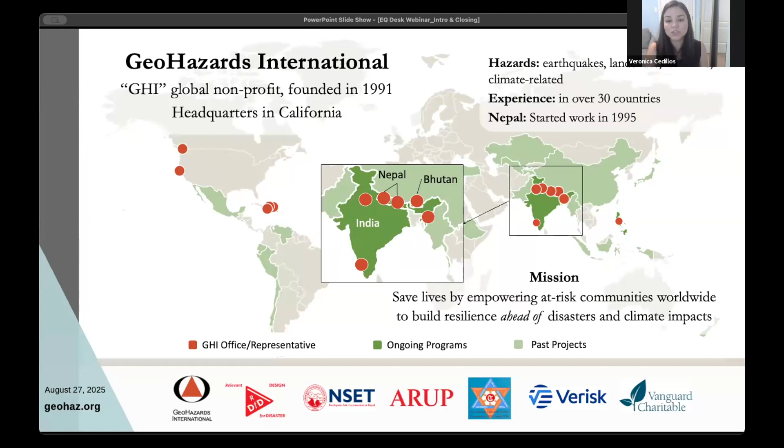For those of you not familiar with GHI, I wanted to give a brief overview. GeoHazards International is a global nonprofit. We were founded in 1991 with headquarters in California. Our mission is to save lives by empowering at-risk communities worldwide to build resilience ahead of disasters and climate impacts. We work on earthquakes, landslides, tsunamis, as well as climate-related hazards. We have experience in over 30 countries, and particular to Nepal, we started working there in 1995.

Before we jump into the particular topic of earthquake desks, I wanted to give you a broader context of the multifaceted approach we are taking to earthquake safety in Western Nepal. GHI works to promote safer new school construction and also to identify and strengthen existing vulnerable school buildings. These are very traditional ways of addressing earthquake safety that we know work. But unfortunately, given the vast number of schools to be addressed and the pace at which they're being addressed currently, if we only address school safety from these two perspectives, it would take close to 200 years for all of the vulnerable school buildings to be made safer. For this reason, it's really important for us to look at interim solutions to help protect the lives of a generation of school children in the meantime in vulnerable schools. So this is why we're looking at earthquake desks.

As we jump in, I wanted to give you a brief overview of what you're going to be hearing today. We're going to start with some background on the project itself. Then we'll get into the design and technical aspects of the earthquake desk. We will then move on to the on-the-ground considerations in Nepal, and finally end with local engagement and implementation.

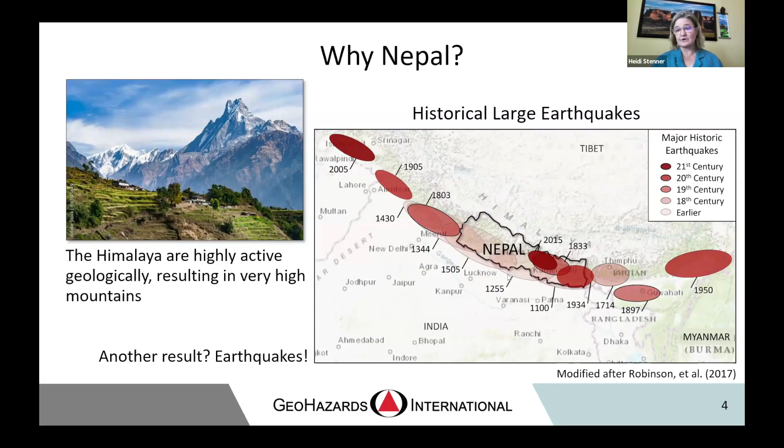And another thing you might notice is that here in far west Nepal, you see these very faint red circles, and that's because the last large earthquake was over 500 years ago. That's why we're focusing on far western Nepal, because that area is particularly at risk. We know eventually there will be a large earthquake. And in addition, there are a lot of smaller earthquakes occurring.

So the far west of Nepal is our first focus area, but ultimately we would love to have earthquake desks in all vulnerable classrooms. Another reason we're focused on the far west is because communities can be easily isolated by landslides during earthquakes or even monsoons. And there's just a lot of vulnerable schools. There also hasn't been any major rebuilding effort like there has been in central Nepal after the 2015 earthquake, where a lot of schools were rebuilt or retrofit to make them safer.

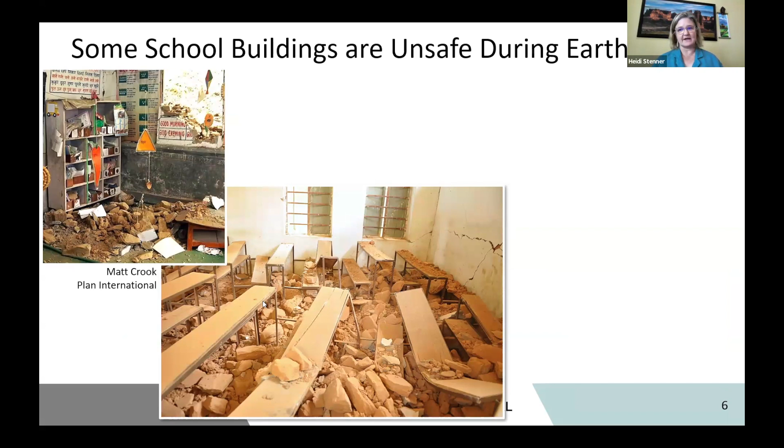So of course, buildings in earthquakes can be unsafe. You see here some pictures. If you imagine sending your kids to school, you'd be hesitant because this can be scary. The pictures on the left are from the magnitude 7.8 Gorkha earthquake in 2015, but even more modest earthquakes, a magnitude 5.7 or 6.4 depending on who you ask. The right two pictures are from the Jajarkot earthquake two years ago in far western Nepal. You can see this school building has had a lot of damage and it would not have been safe to be in it during the earthquake.

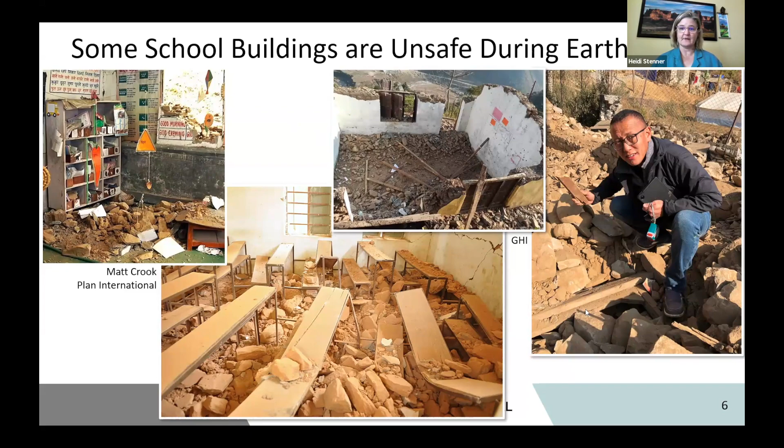And here on the right is my colleague Ishi Lote, standing on another collapsed classroom. This wood piece is an actual desk where students would have been sitting. Fortunately, in both of these earthquakes, class was not in session. So obviously we want our students to be safe during earthquakes. That is why, as Veronica mentioned, GHI is working to promote safer new schools and training for masons. We're also promoting retrofit, but earthquake desks we think can fit into that picture.

So here's the situation as of 2021. There are approximately 35,000 schools across Nepal, and each school has multiple buildings. If about 65% of them are seismically vulnerable, how long might it take to make those all safer? Well, in the 7 years of Nepal's school sector development plan, 120 schools were retrofit or replaced each year. If we use that rate, which takes a good amount of resources, it would still take about 200 years to make all the schools safer. So for the generations of kids going to school in the meantime, we think earthquake desks could be an interim solution to help make them safer.

So, okay, now that we have this beautiful design that is incredibly exciting, we wanted to know, is this even a feasible project for Nepal? Back in 2020 to 2021, we conducted a feasibility study and visited 62 schools across 6 of the 7 provinces of Nepal. We were looking at classroom size, classroom shape, desk types, organization. We talked with people about earthquake desks. We looked at school vulnerability, how much existing desks cost, and we were exploring local manufacturing.

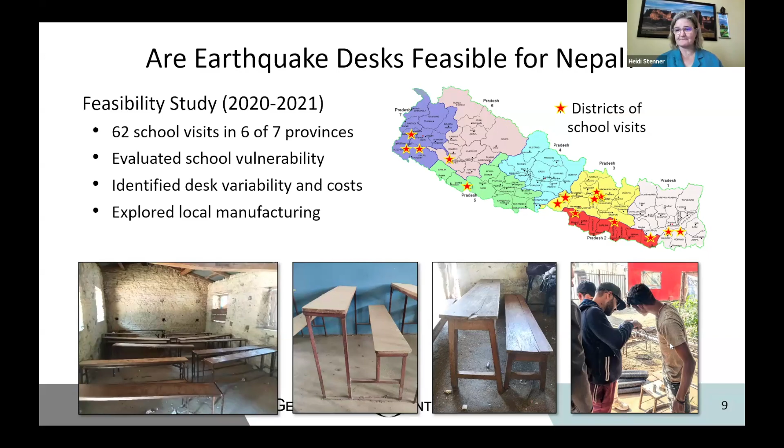Our main findings from that 2021 study are that classrooms can be overcrowded. It's not in alignment with the government's policy, but they can be overcrowded. The desks typically are narrow desks that often seat 3 or 4 or more children. We also found that obviously small children use smaller desks. And the stakeholders we talked with generally had a lot of interest in this design.

We also saw that a large percentage of school buildings are vulnerable in the far west. For example, a couple of studies showed that in one municipality in the far west, Amargadhi, approximately 89% of school buildings are vulnerable to heavy damage or collapse in earthquakes. And that is not an uncommon finding across far western Nepal. So there's a lot of vulnerability.

We also found that making prototypes, which are just one-off, cost less than twice that of the regular desk, and that they last longer. We were also thinking that because there are a lot of rural areas, transportation costs can be quite high for bulky desks.

So ideally, desks should be manufactured as locally as possible. Some of our key conclusions from that 2021 study were that earthquake desks shouldn't be too narrow. We don't want them to tip over. We want them to have enough space to cover children.

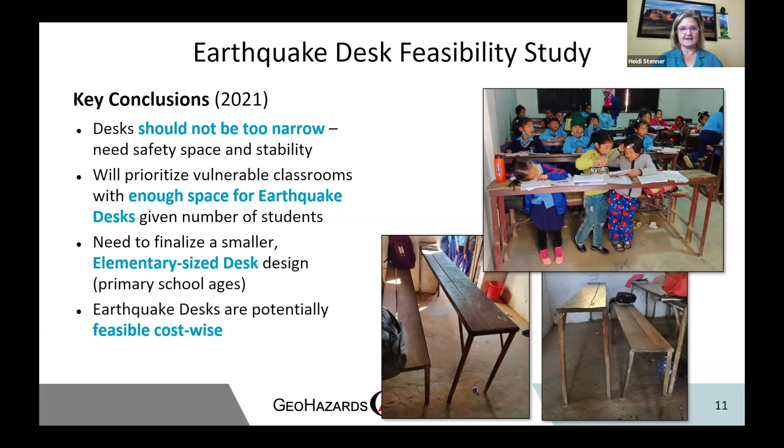We need to prioritize putting earthquake desks into classrooms that do have enough space for the given number of students. And we need to finalize - Ido and Arthur had designed an elementary school, primary school size desk, but it hadn't yet been fully fleshed out, built, and tested. So we wanted to do that, which has been done. And we thought that earthquake desks had the capacity to be feasible cost-wise. That was really exciting for us. So once the feasibility study was done, we felt like we could proceed.

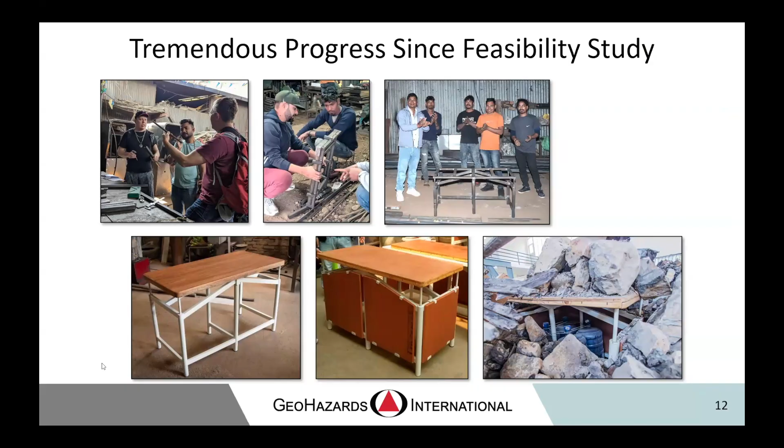Over the 5-year program so far, we've made a lot of progress, and you're going to hear about that today from a bunch of different speakers. I just want to mention, we went from building prototypes, training the manufacturers, to testing them. So it's very exciting, and I'm going to turn it back over to Veronica now.

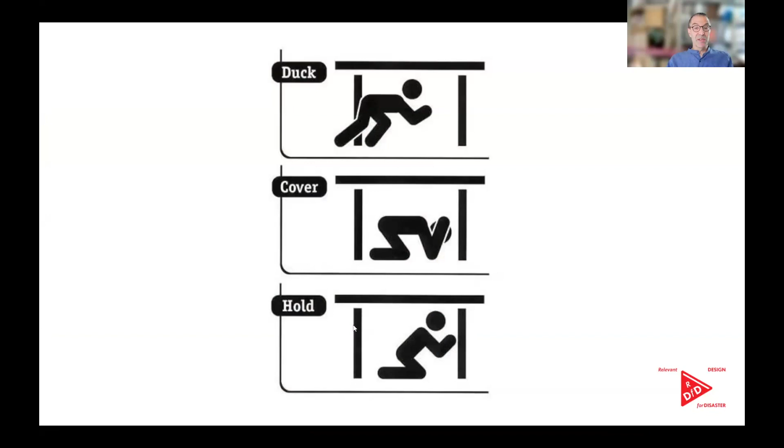Our story begins in 2010 with the big earthquake in Haiti. My student at that time, Arthur Brutter, was exposed to images of collapsed buildings with children under the desks in a school in Port-au-Prince. Arthur realized that the famous duck, cover and hold protocol, which is the worldwide protocol for school children's response to earthquakes in seismic hazardous zones, would benefit from a desk strong enough to create significant protection. This was and still is the case in many parts of the world, as you can see here. In these examples of collapsed schools, one can see that when the school buildings are not built to withstand earthquakes, the problem becomes acute.

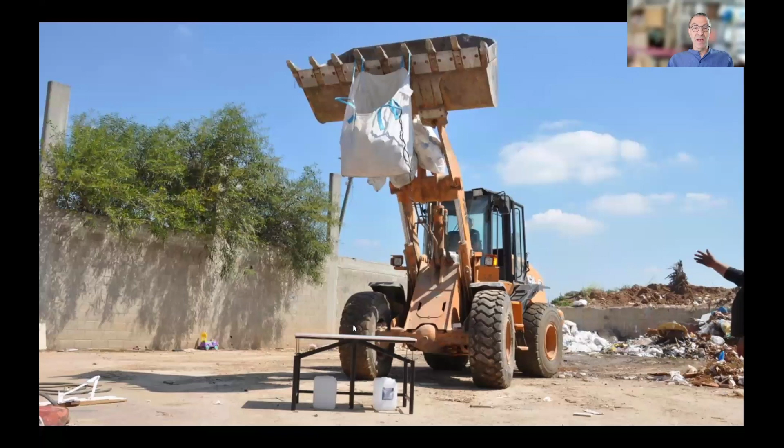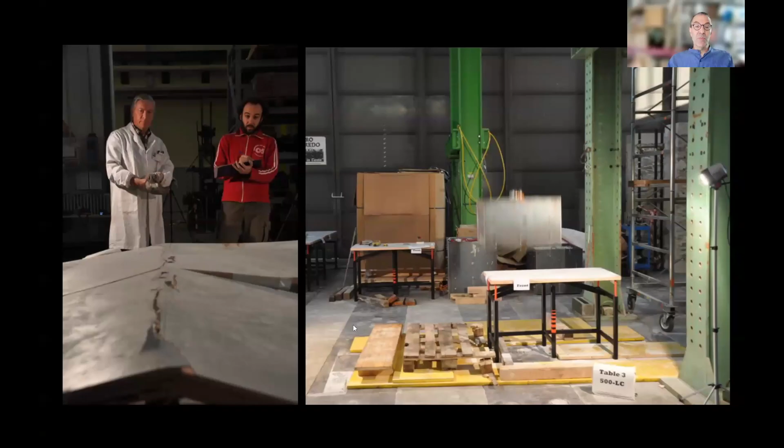So Arthur began building prototypes and convincing people to test them. Those initial prototypes were far from a working product, but the preliminary tests gave us enough information to believe we could reach a real solution. After further development, we filed for a patent, and then after Arthur graduated, we traveled the long and winding road that leads from an idea to a real-world working product. It took us 2 years of experimentation to reach results good enough to seek an official endorsement of our claims. We took 24 desks to Padova University in Italy, to the department that specializes in earthquake-related engineering, where we conducted a series of tests.

Here's a view of some of these tests from 2012. On the left-hand side, you can see a standard Italian school desk, and on the right, various weights and crush scenarios being tested. So here's an 800 kilo weight with dispersed mass, and then you can see a 1 ton weight with compact mass.

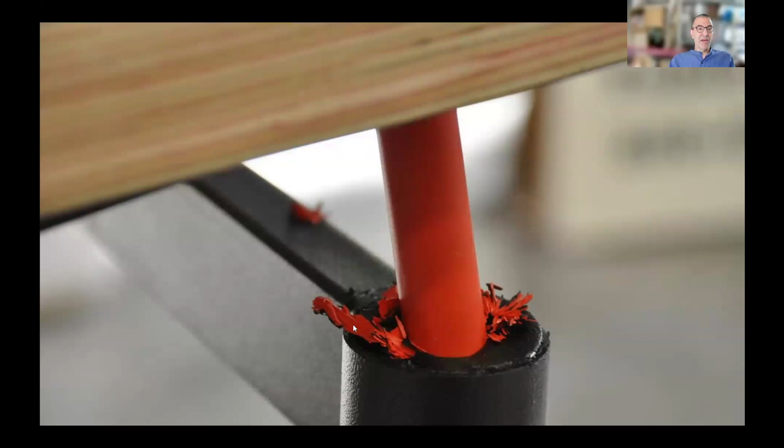So we were extremely satisfied with the results. The desk proved able to maintain a significant safety zone underneath. This was achieved by mechanisms similar to modern automotive design. In order to do this, parts of the desk are designed to crumple and bend, dispersing the energy and transferring it to the ground. This happens while a predetermined safety zone remains intact and protects those taking cover underneath.

The desk also needs to allow for normal daily classroom activity. Our main challenge was to make it strong enough yet keep it as light as possible so that 2 children could lift it up and move it around if needed. The desk therefore weighs only 26 kilograms. Thinking of the cleaning requirements of the classroom, we lifted the lower cross beams to allow for a broom to sweep underneath.

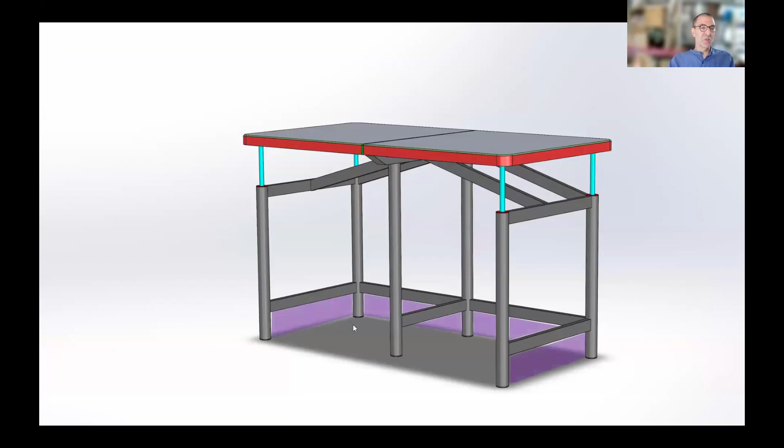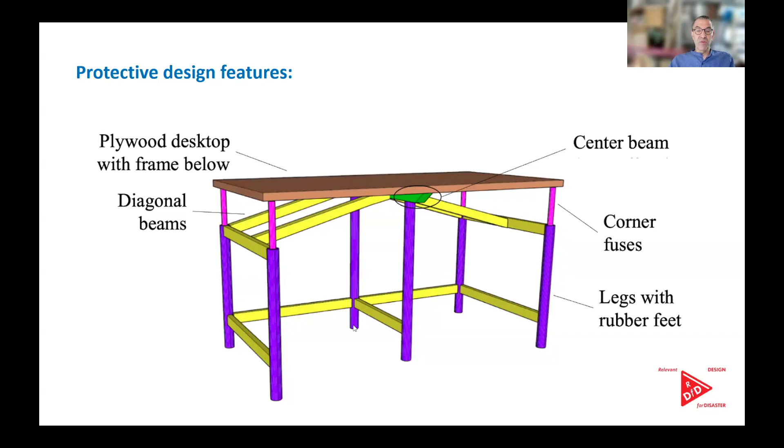This diagram shows the various features that contribute to the safety performance of the desk. The top frame and diagonals, here in yellow, support the desktop as it folds or breaks, building a 2-stage resistance upon impact, effectively preventing the breaching of the safety zone underneath.

The center beam in green, supported by 2 extra legs, not only keeps the structure from collapsing in the center, but also contracts to absorb some of the energy.

And the corner fuses in pink pop into the legs when impacted, creating internal friction and allowing the desktop to fold and create diagonal slopes that deflect secondary debris. And the rubber feet create ground friction that subdues the horizontal movement of the desk.

All along, we asked ourselves the simple question: can design save lives? We definitely believe it can, but in order to do that, we knew we needed to keep working, to find a way to get the desks to the places where they are most needed.

And always with the best of partners. We knew it would have to be a team effort. So in 2015, we were invited to present the desk at the 3rd United Nations World Conference on Disaster Risk Reduction in Sendai, Japan. Several thousand participants came to discuss ways to build the resilience of nations and communities to disasters.

Destiny made our paths cross with the GHI leadership. We were lucky to meet Karma Tshering, Hari Kumar, and Brian Tucker, the then president of GHI. And on the carpet, literally on the carpet of the convention hall, a long and fruitful partnership was born.

We were told that they just finished a campaign to convince children, teachers, and stakeholders in Bhutan to duck, cover, and hold. But they were worried that the desks were not strong enough. The earthquake desk seems to offer a solution.

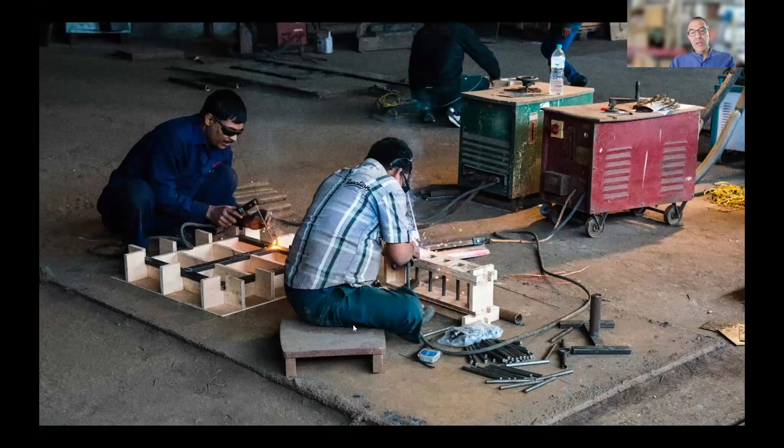We created a system of training for local manufacturers in Bhutan, designed and built a set of plywood welding jigs, and a series of manuals that allow 3 manufacturers to produce good quality earthquake desks for the Bhutan schools.

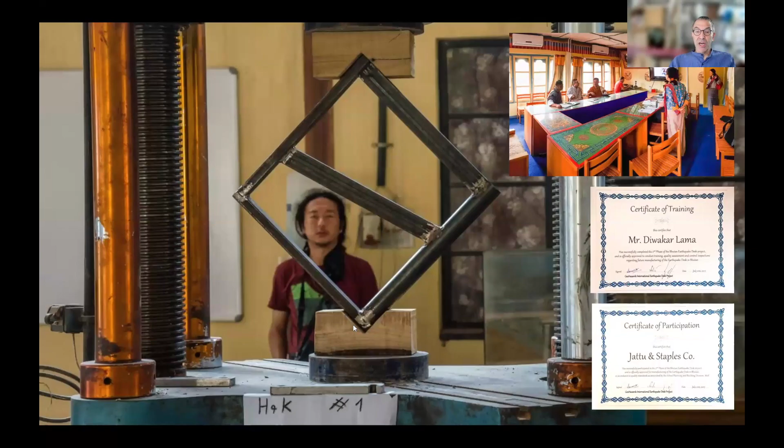With joint effort of the Bhutan GHI team and the Ministry of Education engineers, we created a quality assessment and control method that worked for both the local manufacturers and the government agencies. And after a long and demanding process, we had the satisfaction of delivering a few hundred desks to local schools.

The Bhutan project helped us reach a number of goals: to design welding jigs and production manuals, to establish and support the manufacturer's ability to produce safe desks, and to create a quality control and assessment system that is acceptable by all stakeholders.

We also were able to transfer the knowledge needed in order to manufacture and distribute desks independently, something we would like to scale up and move forward in Bhutan in the near future.

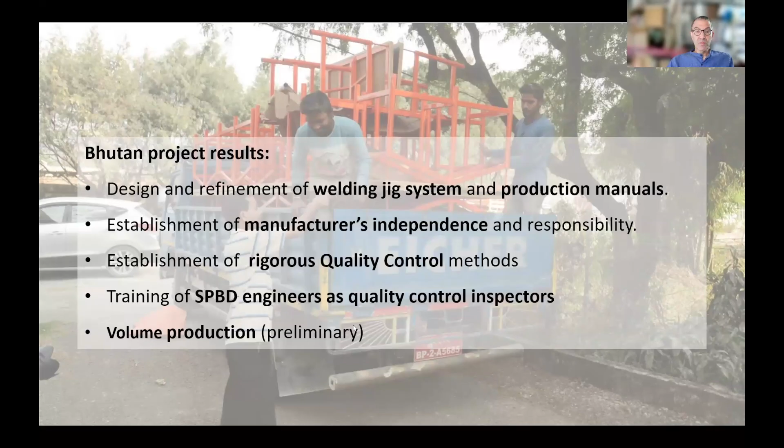And so moving on to Nepal, in 2020 we began a new and much larger project in Nepal. Nepal's population is 37 times larger than Bhutan, so it's a much larger and more complex project. Drawing on what we learned in Bhutan, we began looking at the complex challenge facing us in Nepal.

Now, in the next few minutes, I'd like to quickly run through what we've achieved so far in Nepal from a design point of view, and what more exciting goals and challenges face us in the near future.

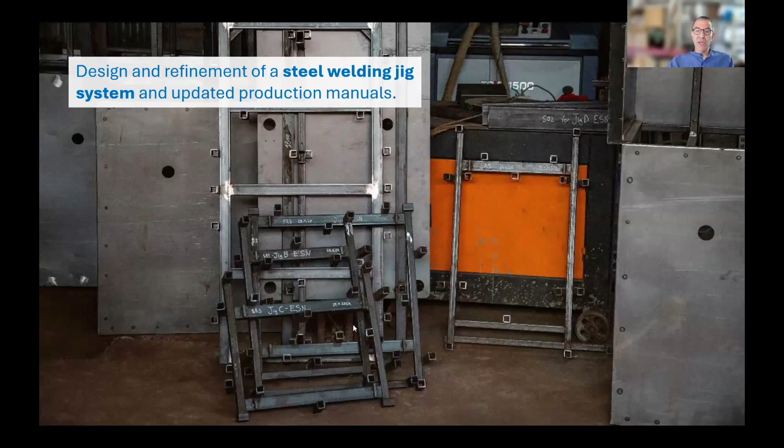The transformation of jigs from plywood to steel allowed for enhanced precision and durability. Once we built the steel jigs with the first manufacturer, SRS, in Kathmandu, they served for training 2 new manufacturers in Western Nepal. So we now have 3 fully trained manufacturers that have the know-how to build 2 different models of the earthquake desk.

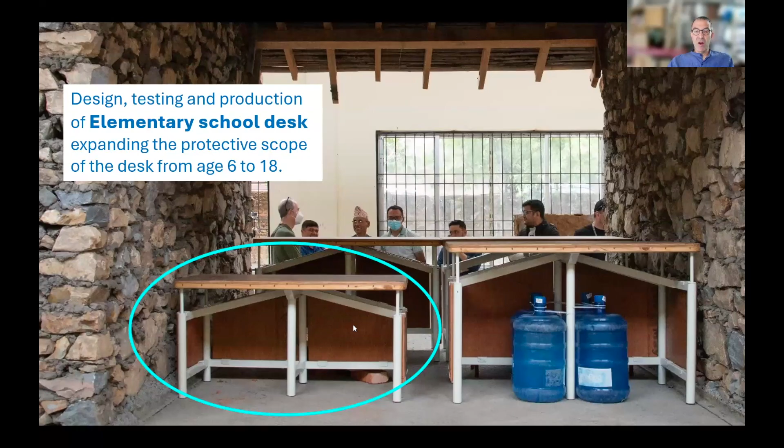The bespoke digital simulation tool created by the Arup engineering team gave us enhanced ability to push the development of the desk forward. Ben Shaw from Arup, who's with us today, will be presenting the simulator in detail soon and elaborate on this wonderful tool. But I'd like to say a few words from the desk design perspective.

In less than 2 years, the creation of the simulation tool has allowed us to add an elementary school model to complete the protective scope. We can now provide a full range of protection for school children of all ages.

It also enabled us to design, build, and test side protection panels to address debris falling in diagonal directions, such as walls buckling due to specific school building features in Western Nepal. I believe Mark Villetz's presentation will relate to that when he discusses the various tests we conducted at Tribhuvan University. We also benefited from the simulation of a narrower desk design.

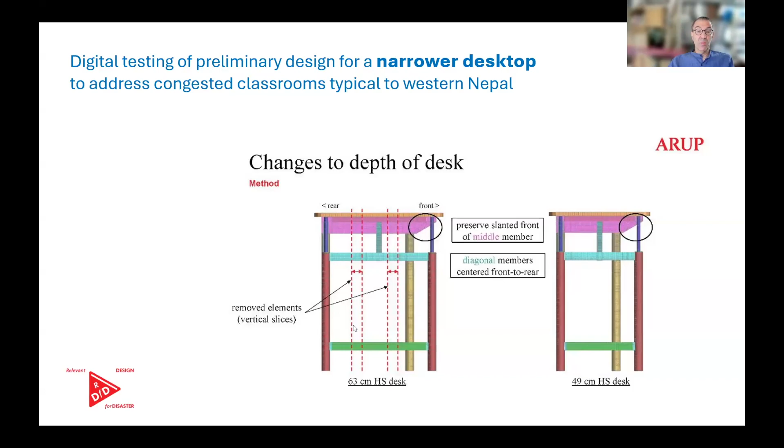Some of the ability to introduce desks to schools is challenged by small and congested classrooms. With the simulator, we could digitally test design adaptations that might help us in the future to fit more desks into each classroom.

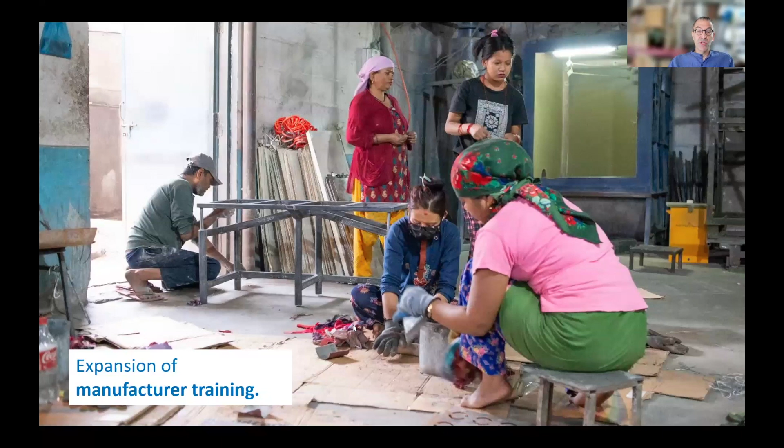So what would we like to do when we have the time and budget? Now looking to the future, I think we would like very much to expand manufacturer training. This will allow for better geographical distribution of manufacturing facilities and scaling up of production and desk placement in schools.

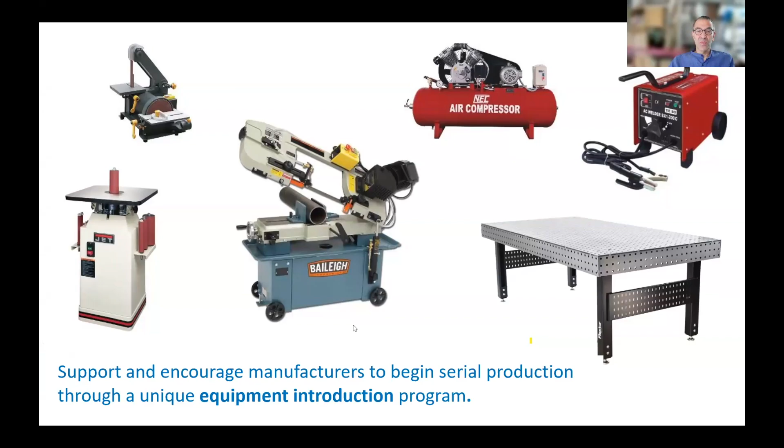We've learned that initial tool acquisition, leading to quicker and more precise manufacturing, is sometimes hindered by economic barriers and lack of adequate tools. We seek to create a program that will allow manufacturers to work with better tools earlier in the production process. We found that presentations and live demonstrations of the desks are highly effective.

It's important for us to have a continuous dialogue with many relevant stakeholders, including the engagement of the public in crush test demonstrations. We'd like to do more of those. And in the longer term, in a future phase of the project, build narrower desk prototypes and test them physically.

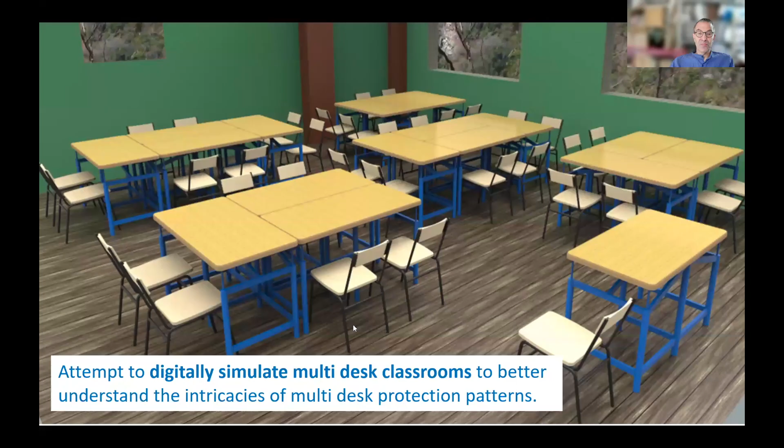We believe that an earthquake desk classroom holds a number of advantages in disaster circumstances, a classroom rather than a single desk, but it is difficult to project the actual performance of many desks together. This requires sophisticated programming and computer power we hope we can tackle.

And of course, our ultimate goal is to begin volume production and distribution of desks to as many schools as possible. At the end of the day, we want to have desks in place anywhere they can be effective.

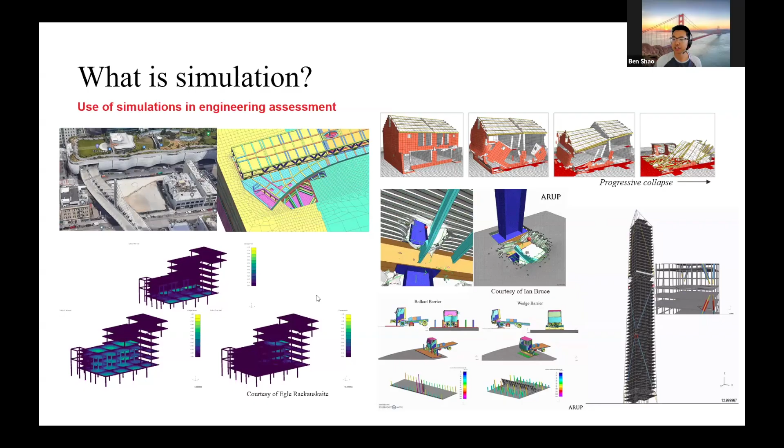So why do we think simulation can be important and add value to the project? As Ido mentioned about the desk design and also some of the testing, looking at the desk itself, the engineering assessment of the desk is a very important part of this whole initiative, to make sure that we understand how the desk is going to behave during loading, and whether the desk is strong enough to resist the expected loading in earthquakes.

Obviously, to do the engineering assessment, one best way is to do testing, as you can see here, and Ido mentioned a bit, and I'm sure Mark is going to talk more about that in a minute. But why do we need simulation? Because sometimes testing has limitations - you need to set up the test, it's lengthy, and sometimes it costs a lot, so it's not that flexible.

So simulation can really help supplement the test when you're doing the design and evaluation of this earthquake desk. That's where Arup's contribution comes in, where we do simulation. Our main objective is firstly to explore whether we can simulate the desk's behavior, because it's quite complex when you consider different parts of the desk interacting with each other. And then, if that's successful, we can use the simulation as a tool to quickly test out design iterations, as Ido mentioned, and also look at different things.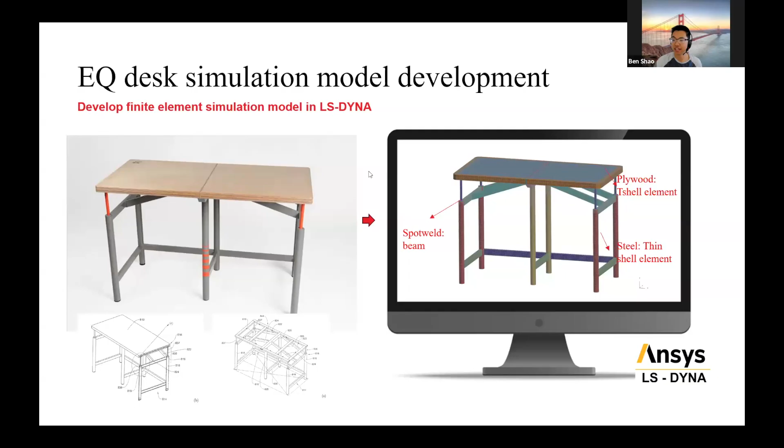Then we validate the model against different types of testing. We look at testing from different loading scenarios and different locations of loading, different amplitudes of loading, to confirm that the simulation model can capture the behavior well.

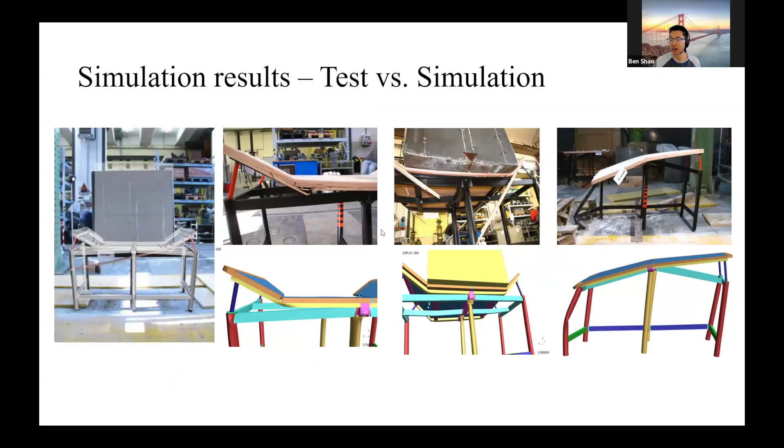So here are some pictures you can see from the testing itself versus the simulation. You can see the simulation model can not only simulate the global behavior of the desk, but also capture the local failure or deformation pattern of the desk really well. These are comparisons from different testing scenarios, not just one single validation for one single task.

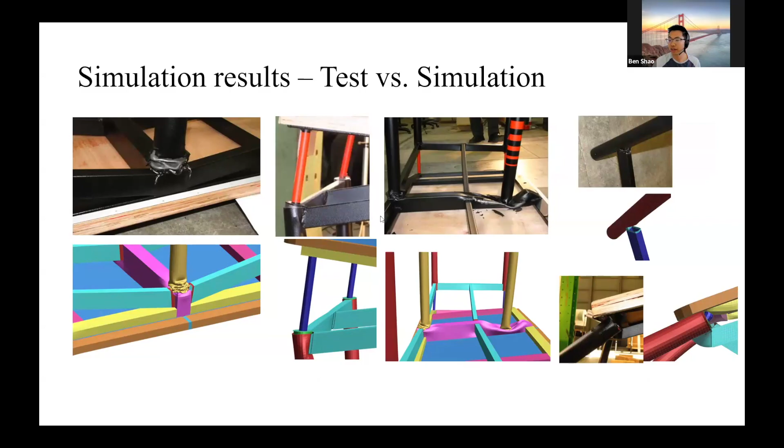So after we confirm that the simulation model can really produce good insights by reproducing the correct behavior of the desk, both locally and globally, then we use the simulation to support the engineering evaluation of the desk in various aspects. For example, we use the simulation model to test how the desk performs with different sizes and different design aspects.

We also use the simulation model to explore, for example, what the ultimate load of the desk is. And some other things we look at are, if certain parts of the desk manufacturing process have uncertainty, for example the welding has low quality, how that's going to impact the desk behavior.

So the simulation really adds a lot of value to the project in terms of engineering assessment, and it provides a useful tool to quickly assess the behavior in a very efficient way.

So we're very proud to be part of the team and to develop the simulation model to support the desk design and evaluation. We will continue to support this initiative using our expertise in simulation and risk assessment.

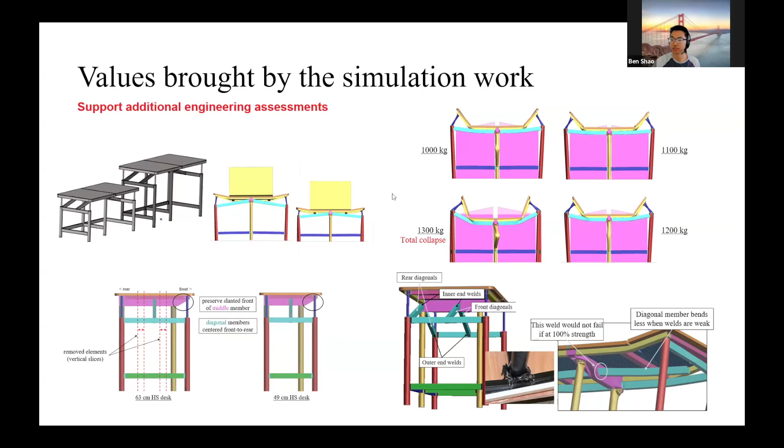I find that simulation work just fascinating. We're now going to move to Professor Marc Veletzos at Merrimack College, who led the physical laboratory testing efforts. Professor Veletzos, please go ahead.

Hi everyone, my name is Marc Veletzos. I'm a professor of civil engineering at Merrimack College. I'm going to talk to you about the physical testing results.

The goal of physical testing in Nepal was to better understand how Nepal-built earthquake desks are likely to behave in vulnerable school buildings during strong shaking, and to understand the extent of their protective abilities for school children.

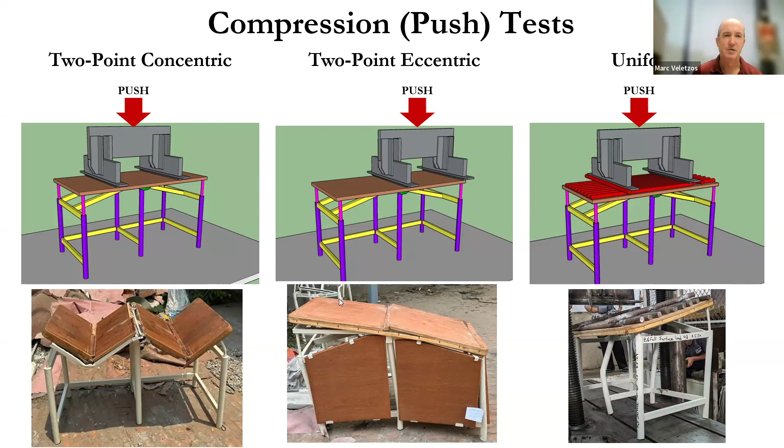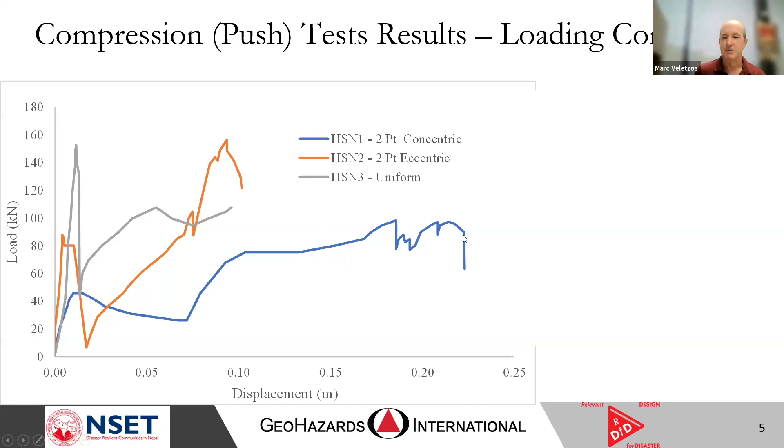So the damage characteristics are shown underneath. We assessed these with load displacement curves shown here. I won't get into the details, but overall all the different loading scenarios supported significant loading. 98 kilonewtons was the minimum loading we saw, shown here with the two-point concentric test.

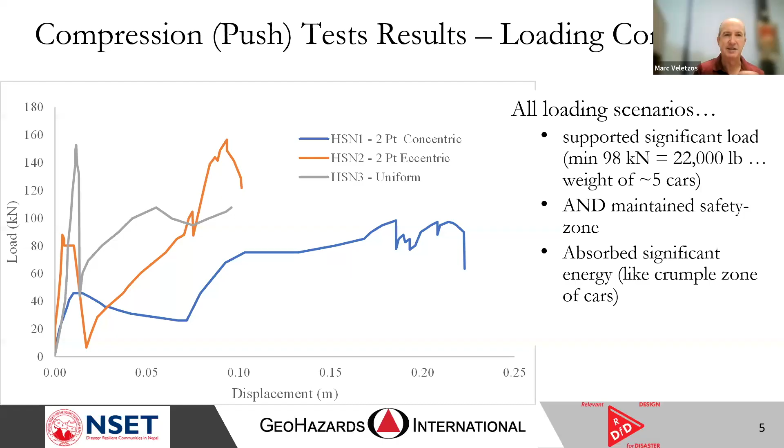That's the weight of about five cars, so pretty significant loading. They all maintained their safety zone underneath and can absorb significant energy, just like a crumple zone in a vehicle. So it absorbs damage and still keeps a safe zone for people.

In terms of the shock table testing, the dynamic loading, we designed a full-scale mock-up of a school building. This had typical stone masonry wall thicknesses with mud mortar.

We had a heavy roof system with bamboo planks and mud filling, as well as slate stone roofing, with a roof-wall connection to ensure the roof and wall stayed connected so the whole system collapsed in one go. The intent was to design for the largest reasonable loading on the desk, not necessarily the most common school system out there. So this is a system with heavy fragile walls as well as a heavy roof.

In terms of shock loading, we applied several small shocks by pulling back the pendulum a small amount, up to 10 degrees. This produced fairly small shocks with minor or moderate damage to the building, nothing on the desks. Then we produced a single large shock, which caused full collapse of the building, representing the largest loading on the desks.

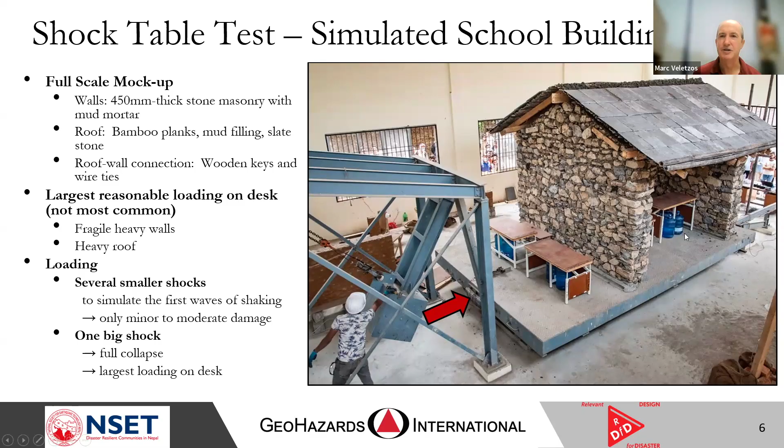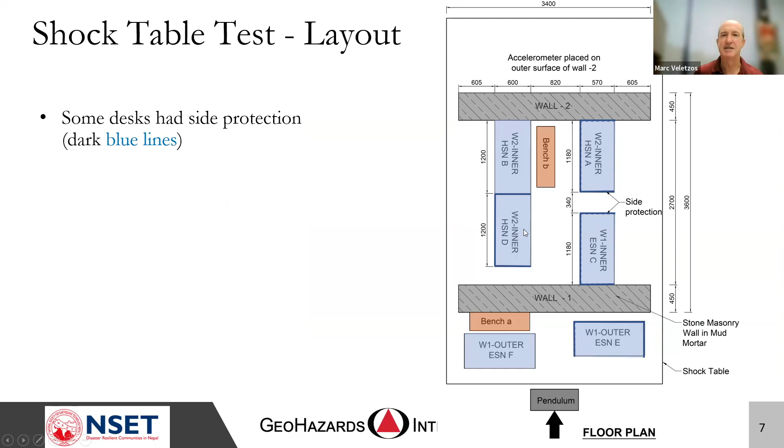Notice here where the desks are laid out. You also see some water jugs underneath, which simulated children. Here's another view showing the layout of the desks. The dark blue lines represent desks that had side protection. The orange is where we put benches to study the debris flow.

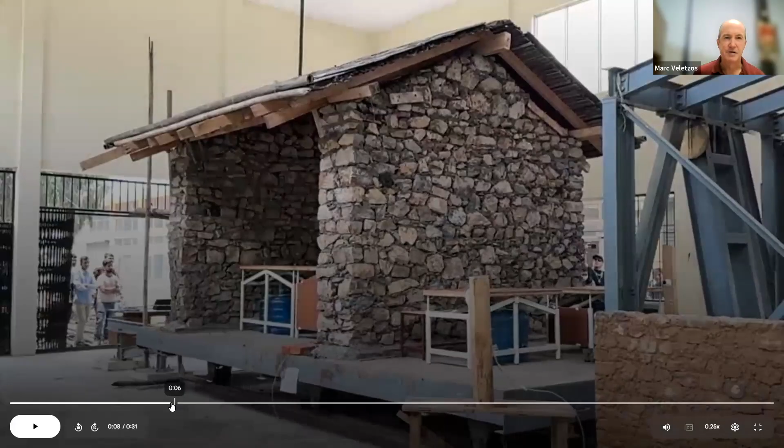Let's look at some quick videos. That was the largest pendulum loading, which happens very quickly. Let's look at that in slow motion. Here's the impact - the pendulum impacts, boom - you see the desks topple a little bit.

Look at the wall collapsing here, boom. You get some wall debris. Notice it's not all the wall at one time, but a decent portion - really only about half the wall width collapsing. The stones are separating, so you're getting repeated impacts. As this debris collapses and the roof collapses, it hits the debris and pushes the desk sideways. You get that lateral loading, and the roof completely splits.

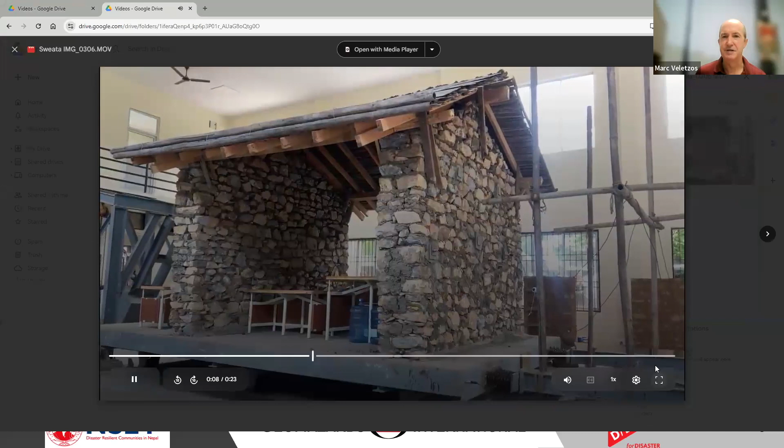Let's look at another view, again full speed first, and then let's do that in slow motion.

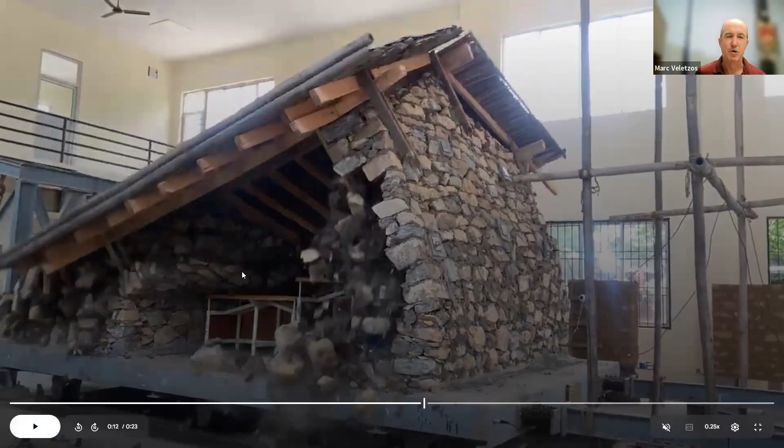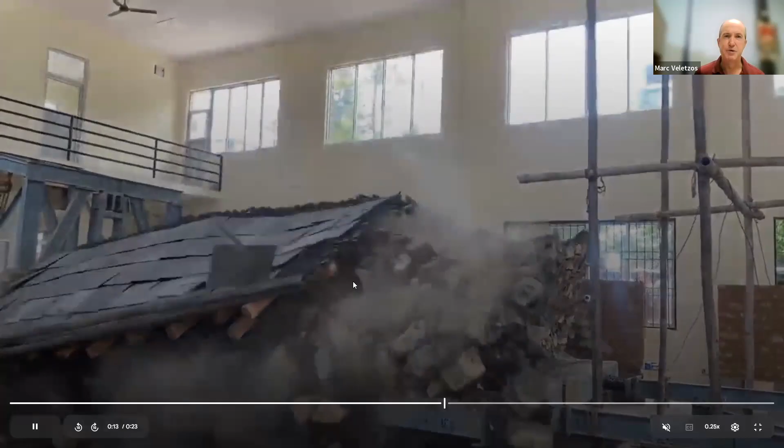You see the wall splits, with that vertical crack up the wall separating the wall widths. The wall starts collapsing here - see the individual stones falling. Right here you see a portion of the wall impact the top, about to hit the top of the desk, but again it's only a portion of the wall width. The largest load happens right there, boom, when the roof hits the top of the desk.

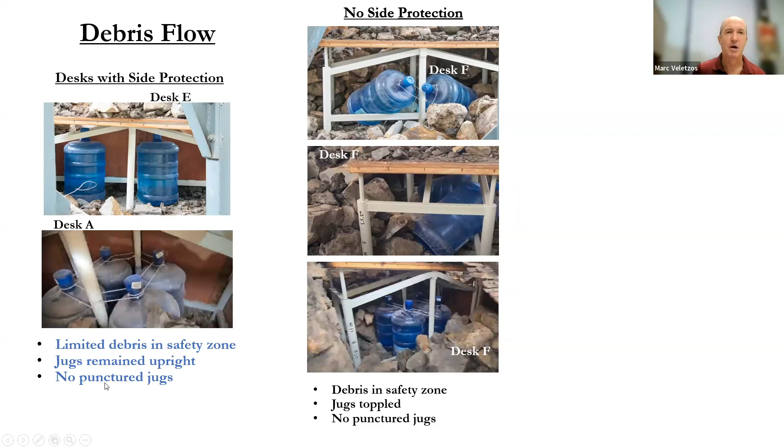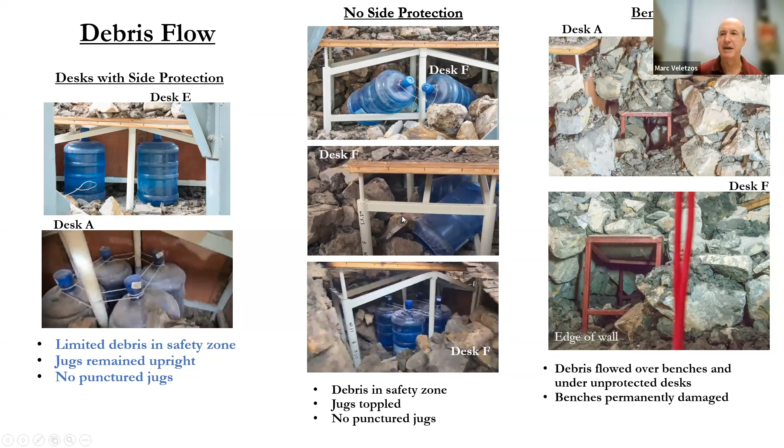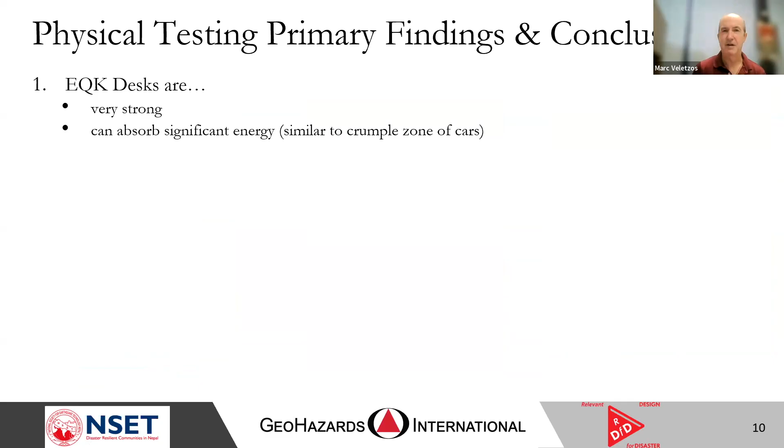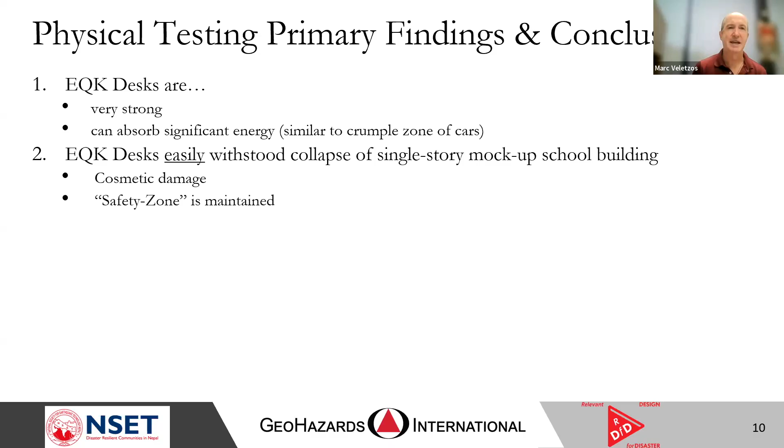Primary findings: the earthquake desks are all very strong. They can absorb significant energy, similar to a crumple zone of vehicles. The earthquake desks easily withstood the collapse of a single-story mock-up school building, with only cosmetic damage to the desks. The safety zone was well maintained, suggesting these desks could withstand an even larger collapse loading than what we showed here, which was considered to be the largest reasonable loading for a single story.

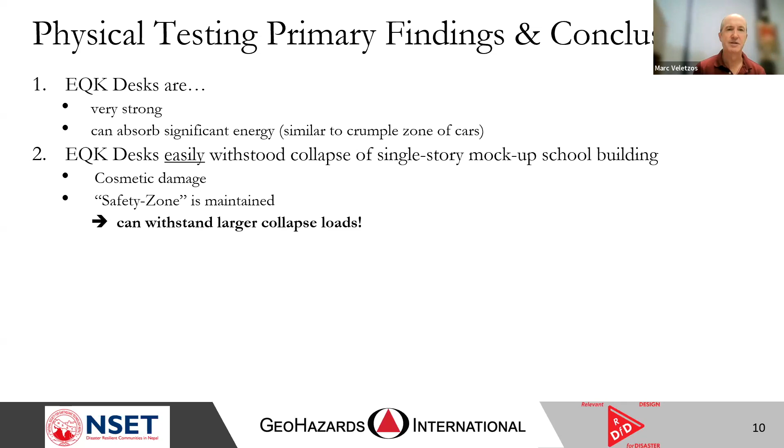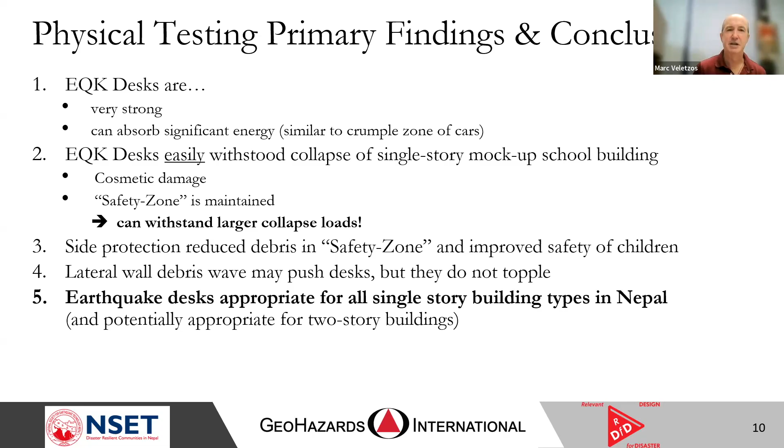The side protection significantly reduced debris into the safety zone and improved the safety of the children, so I would recommend moving forward with those. The lateral wall debris wave did push the desks sideways, but they did not topple. Overall, we'd say the earthquake desks are appropriate for all single-story building types in Nepal and potentially appropriate for two-story buildings. Thank you very much.

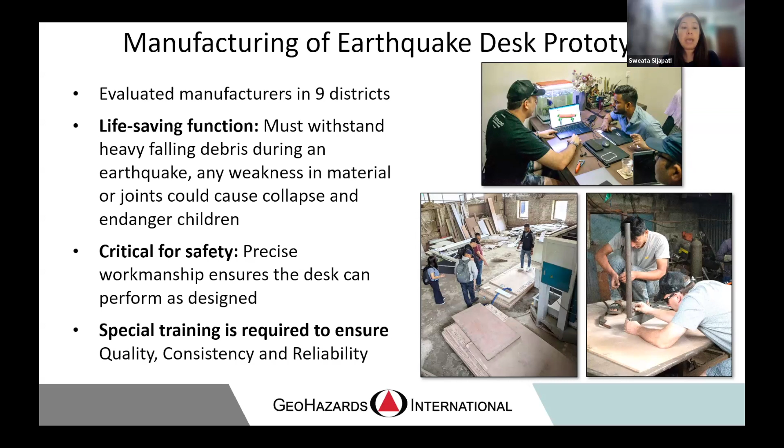Reliable enough to be placed into vulnerable school buildings. As Heidi has already mentioned, our focus is more on the far western region where the need for these interim solutions is high.

We're also more focused on local manufacturing of the desks so that we can build community capacity and also strengthen community confidence in earthquake safety solutions, as the community and school authorities can see these desks being built in their community using local materials rather than being outsourced.

And here are the photos of the manufacturer being trained by our team.

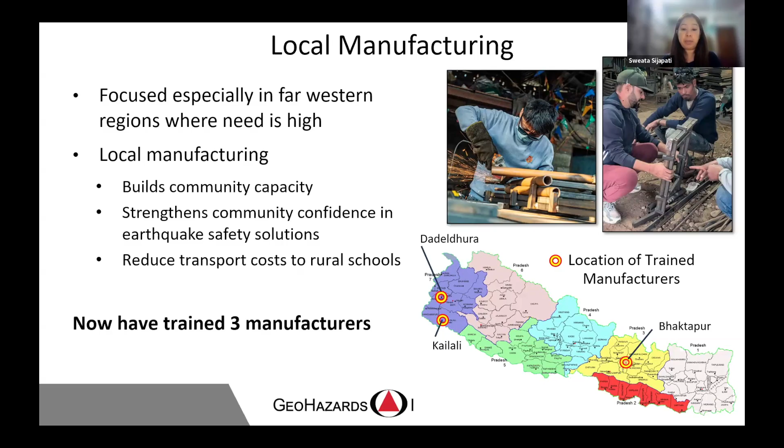We also did a cost comparison study of the earthquake desk with the normal school desks used here in Nepal. We found that the most commonly used desks were 4-seats with bench attached, and that it would cost about $85 to $145, approximately 11,000 to less than 20,000 Nepalese rupees.

Whereas other regular desks, like 2 to 3 seats, would cost about $45 to $65, and the earthquake desk 2-seat prototype would cost about $70 to $110.

At first glance, the earthquake desk seems a bit expensive compared to others, but I wanted to mention these were prototype desks built in very small numbers. Also, the materials and precise workmanship that go into making this earthquake desk are of very high quality, which adds to the cost of the desk itself.

But when we think about it in the long term, we see that the earthquake desk can be made cost effective because it requires very little maintenance compared to regular desks. This is from our experience of placing earthquake desks in Bhutan for almost 10 years now.

We are also exploring opportunities for cost reduction, and we found that once we go into volume production of the desks, the cost can be minimized.

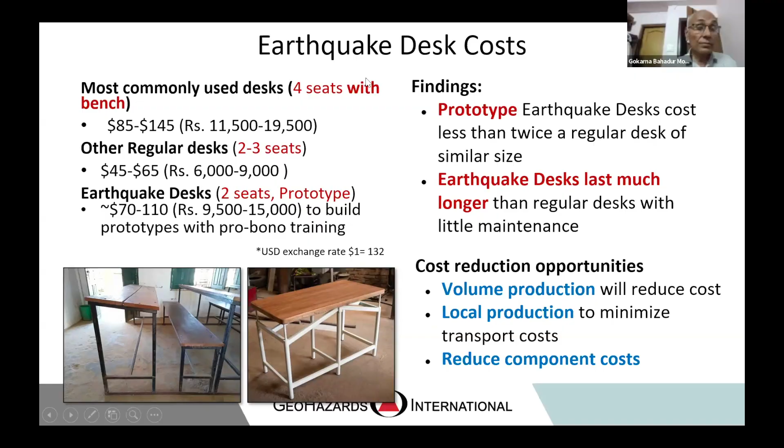We're now going to move over to Professor Motra at Tribhuvan University, Institute of Engineering, who has provided technical support, particularly as we look to implementing quality control and quality assurance processes. Professor Motra, please go ahead.

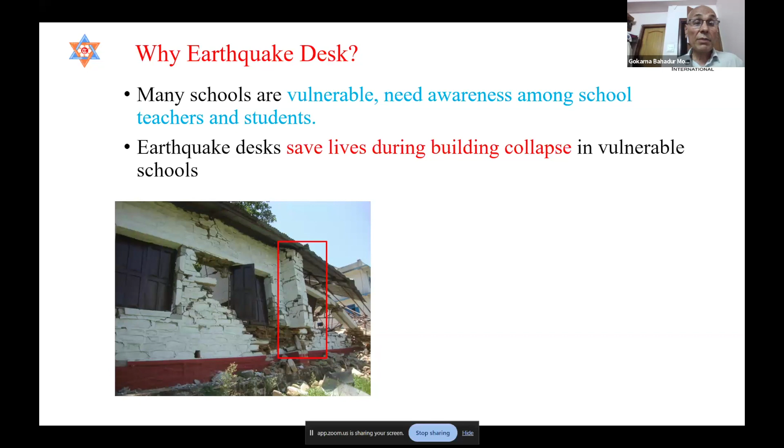We all know that these school tables, these earthquake table desks, are very useful for vulnerable schools, which we can see in this slide. One of the schools that was damaged during the 2015 Gorkha earthquake.

So for the fulfillment of the set objectives, the quality control aspect plays a very vital role. For proper quality control, first of all, we should have proper quality raw materials. That means whatever we are using, those metal parts, and wooden board, those are of proper quality.

Since these materials are manufactured in the factory with good process and good quality control, we can rely to some extent on the quality provided by those manufacturers, but for certainty we must test at site.

Hiring third party quality control is also required, and then proper equipment for the manufacturing of those tables is also necessary. So we should assist to acquire those required equipments also.

After that, skilled manpower is very important. Trained and skilled manpower for the manufacturing process, especially for metal parts cutting and welding. Welding is a very special type of thing, and it requires special quality. So for the proper functioning of these tables, welding plays a very vital role. We have to ascertain the quality of those things also.

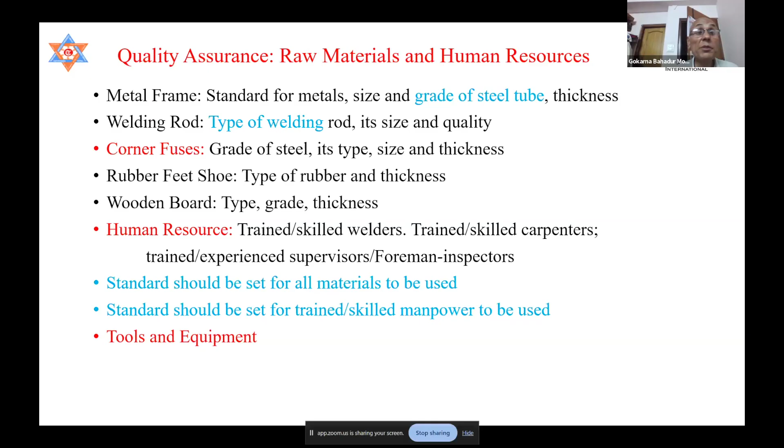For those things we have to have proper material standards and proper specifications, and we should have proper standards for trained and skilled manpower to be used, as well as for the equipment to be used also. For that, we will prepare a quality assurance checklist of all those materials, manpower, and for the product also.

In the process of manufacturing, we must have regular as well as interim quality control process. For that, we will prepare a quality control checklist, and accordingly regular checking during the process will be there through the site supervisors, and in between we will have quality checking from the experts also.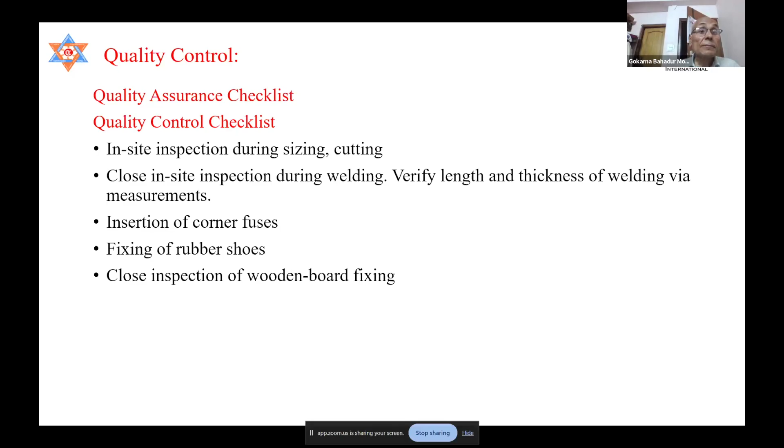Material storage and other processes should be verified, and test certificates of all the materials as well as manpower are required. Finally, during the manufacturing process, we should have proper safety for the work persons. That should be ascertained at the site itself.

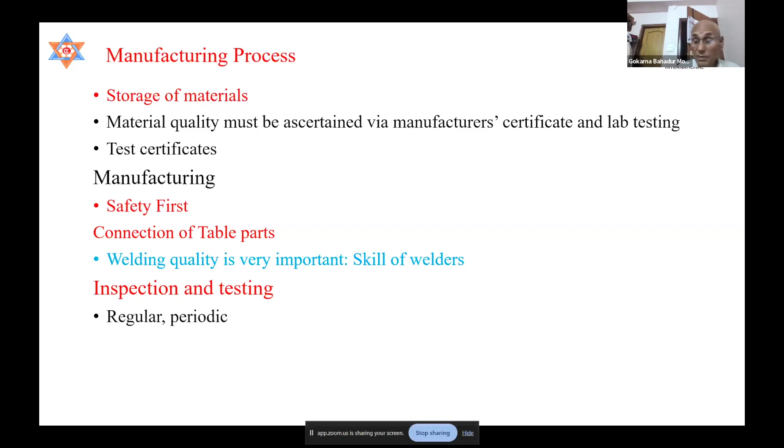Welding quality, as I already told, is very important, and skilled manpower is required, as well as quality of welding rod is very important to have proper quality tables. So inspection and testing is a must during the manufacturing process. That will be provided through regular and periodic testing. Thank you very much.

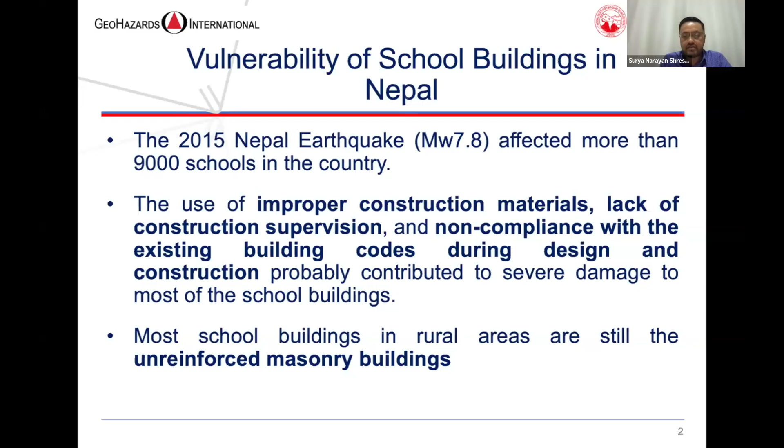As Heidi already mentioned about the earthquake hazard of Nepal, equally the vulnerability of school buildings is very important. We observed during the 2015 Gorkha earthquake in Nepal that more than 9,000 schools throughout the country were affected, which is due to poor construction materials and poor construction supervision, non-compliance to building codes during design and construction. All these contributed to the severe damage of school buildings during the earthquake. Still, we can see most school buildings in rural areas in Nepal are unreinforced masonry buildings, which are relatively highly vulnerable to earthquake ground shaking.

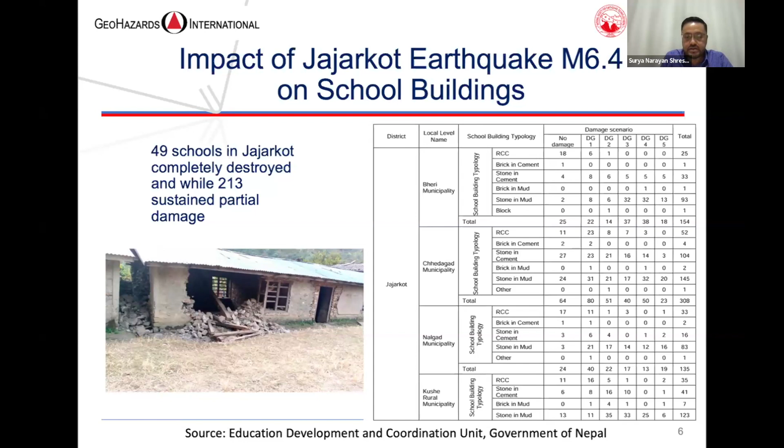We have observed this kind of damage during the 2015 earthquake and during the recent 2023 Jajarkot earthquake also - partial damage of masonry buildings, roof collapse of masonry buildings, as well as damage to concrete buildings. So we have observed not just full collapse of school buildings during earthquakes, but school buildings might suffer partial damage, damage grade 1, 2, 3, to significant damage or full collapse. We need to consider different levels of potential damage to school buildings when we consider the safety of the school children or residents of the buildings.

The 2015 earthquake and 2023 earthquake in Jajarkot both happened during non-school days and non-school hours. Fortunately, because of that, the school casualty was significantly less during both of these earthquakes. But if the earthquake had occurred during school days and school hours, the casualty could have been significantly higher. This suggests the requirement of safety in our school system, school building systems.

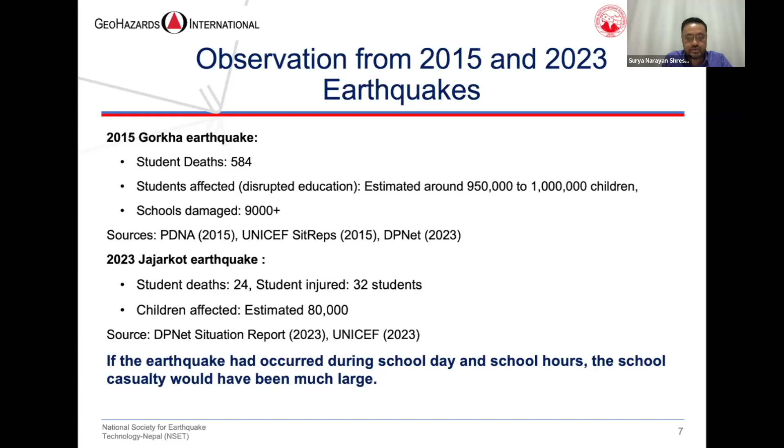The best solution is definitely strengthening of all school buildings throughout the country. However, this takes probably several years. We have more than 30,000 schools throughout the country, of which we have more than 80,000 plus school buildings, school blocks, and of which more than 50% are highly vulnerable to earthquakes.

If we consider the retrofitting progress so far, during the past 20 years, we have retrofitted almost 2,000 school buildings throughout the country, excluding the 5,000 plus school buildings that were safely reconstructed after the 2015 Gorkha earthquake. So at this speed of retrofitting or strengthening of school buildings, it will take several hundred years to reconstruct or retrofit all these buildings to a required level of safety.

And also this requires a significant amount of resources for retrofitting or strengthening of these buildings, which is a relatively difficult job to accomplish. That is why having these earthquake desks in vulnerable schools is a good interim solution to reduce the risks.

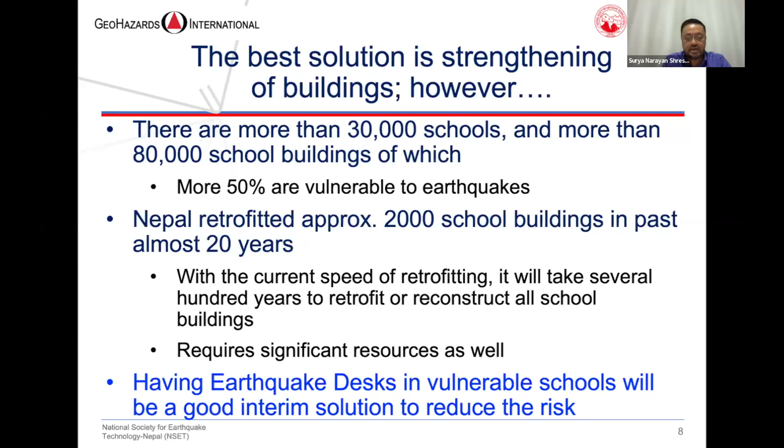Another consideration we have observed during the 2015 Gorkha earthquake, this is from research done after the 2015 Gorkha earthquake by Marla Petal and team, of which we are also part. One of the important observations was that most of the casualties happened because of the trapping and crushing of the residents, and also because of being struck by falling objects.

This suggests that if we can protect our heads and other sensitive parts of the body, then the persons can be saved. That is the important observation from the 2015 Gorkha earthquake also.

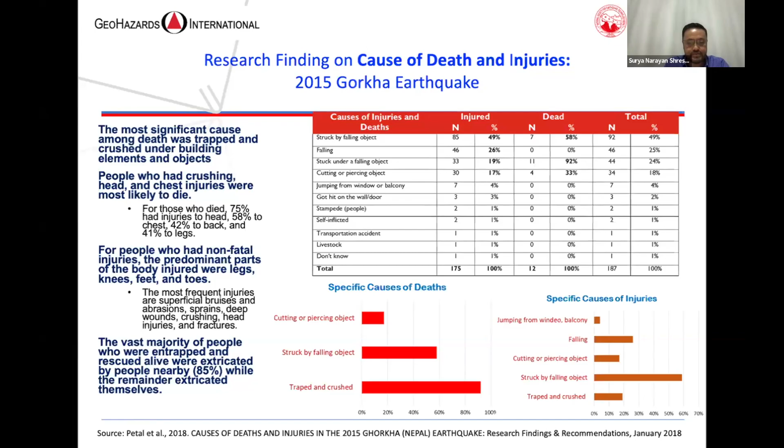Another consideration is we know that Nepal is highly vulnerable to earthquakes. Nepal's seismic hazard is very high. But at the same time, we also know that there can be frequent low to moderate magnitude, moderate intensity earthquakes, causing minor to moderate structural damage and non-structural damages.

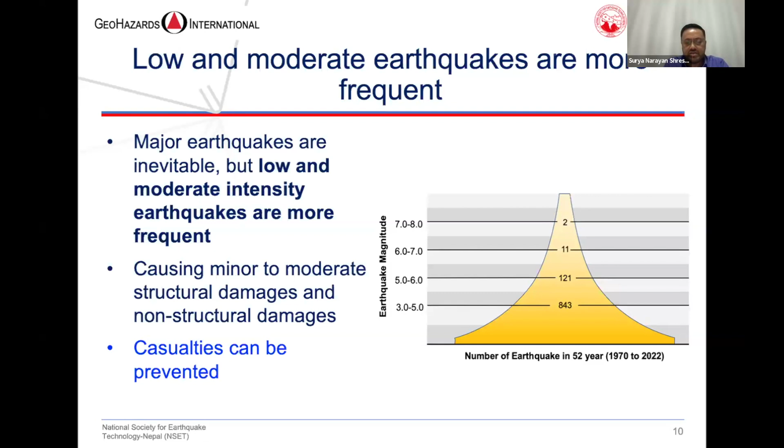So these minor to moderate non-structural and structural damages, because of falling objects or the partial damage of the walls, can cause significant harm to the students. And for these non-structural damages and falling objects of the structural elements, these earthquake desks can prevent the casualties.

Another consideration is in most cases, existing desks are very poor in normal circumstances in Nepal, which require significant and regular annual replacement, repair, and maintenance, which requires significant costs. And investment in such earthquake desks can be very cost effective in the long run. And definitely costs can be reduced by further improvement in the desk design and also by scale of manufacturing of the desks.

And local adaptation of design, local manufacturing, and local involvement for understanding and dissemination of the desks will enhance the effectiveness of the desks so that lives in schools can be protected. So even a single life protected in a school or in a building by use of such desks will definitely be an added value in these kinds of highly vulnerable countries.

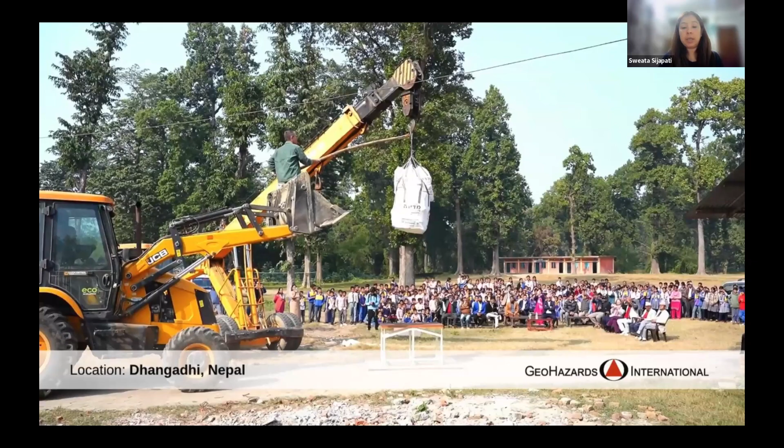The first live demonstration we did was for the Dhangadhi workshop, and we did it in Ghanteshwar Secondary School in front of school children, school authorities, and mayors from various municipalities who attended the program. And here a load of 700 kg was dropped from a height of 3 meters, which is approximately the height of a single-story building.

The second drop test we did was at the Institute of Engineering, Pulchok, in front of undergraduate and master students, along with faculty from the Department of Civil Engineering. A load of 710 kg was dropped from a height of 3 meters.

We also did the same drop demonstration on a regular desk, dropping a weight of 350 kg from 3 meters. As you can see from the results, the regular desk was completely damaged, whereas the safe space under the earthquake desk was still maintained, where children could take shelter during the shaking.

The workshop with live demonstration generated a lot of enthusiasm and support from participants. We collected feedback, including positive aspects, challenges, and potential solutions. In the picture, you can see participants explaining, doing group work, and giving us feedback in written form. We also had several rounds of discussion with school authorities, including principals and school management teams, on the relevance and adoption of the desk.

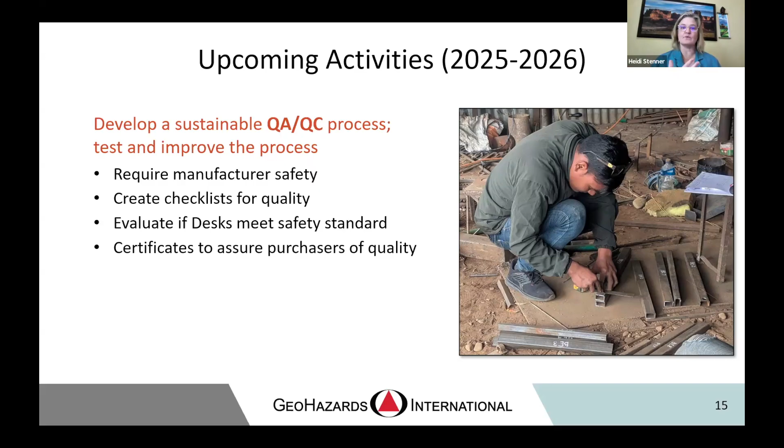As Professor Motra was talking about, we need this quality assurance, quality control program, QA/QC process. Additionally, we want to test and improve it because it's just beginning. We need to make sure manufacturers are safe, have quality checklists, and evaluate that the desks are actually meeting that quality standard. And then we need a certificate or some document that shows these desks are the quality they need to be, so purchasers can be assured.

We're going to continue communicating and seeking feedback from stakeholders and collaborating with 1 or 2 pilot communities in placing our desks, so we can learn from that process. And we're supporting efforts to mainstream this process with local stakeholders.

Arup will be providing further benefit on the program by including more simulations of design modifications and conducting sensitivity tests that will be very useful. They may be able to simulate multiple desks in a classroom. It starts to get a little more challenging, but then we may also be able to do 2-story simulation models or use different building typologies and simulate the effect of that failing onto a desk.

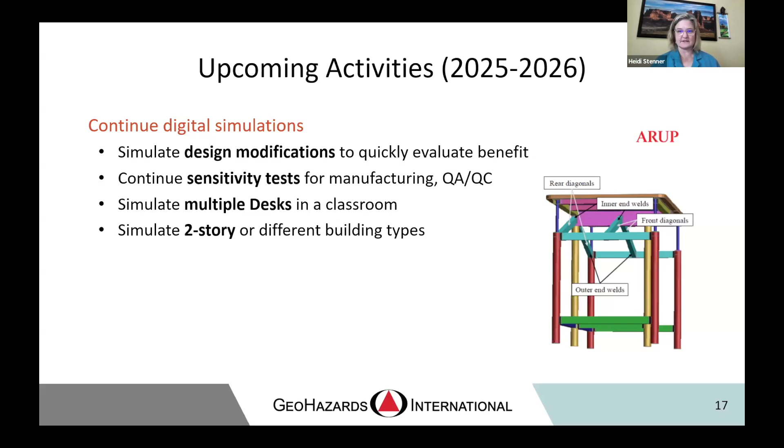We want to make sure our selection process is very clear regarding which schools will be receiving the desks as far as priority. Obviously we want as many kids as possible to get the desk, but with limited budget, time, and volume of actual desks, we have to prioritize. So we want to be very clear about that.

It will incorporate government data. They have information on when a school will be abandoned or merged, and the building vulnerability. We want to maximize benefit for the most students, and be able to leverage new opportunities so we can get more desks into schools. We want to be clear when we communicate these criteria with the stakeholders.

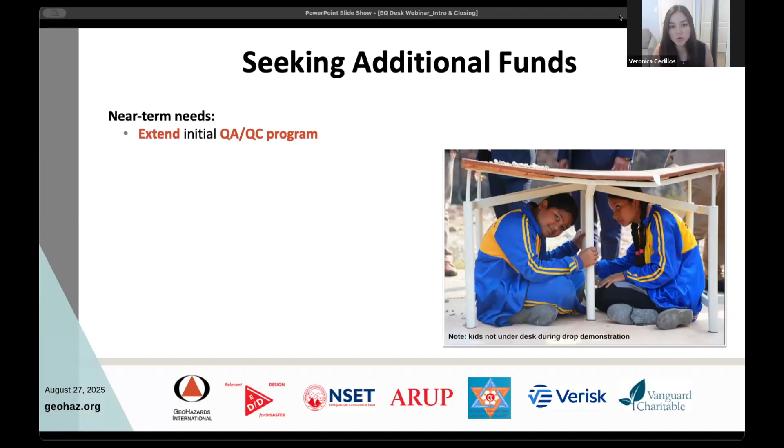We also have a lot of ideas in ways to facilitate earthquake desk implementation. This could look like developing information and guidance materials for local leaders to understand how earthquake desks can be valuable, and where they could be most useful. Similarly, developing materials and conducting campaigns for public awareness. And a really important aspect is policy advocacy.

This is to help set up mechanisms to make procuring earthquake desks sustainable into the future. And of course, we always welcome more funding so that we can place additional earthquake desks in vulnerable schools as part of this initiative.

Looking beyond the near term, we are interested in expanding our focus. Right now, we're very interested and focused in Western Nepal, but there's a lot of need across the country. And we've also been very focused on government schools, so we'd love to expand that to private schools.

Similarly, we would love to push along the quality assurance, quality control program and get to a point where we can support a launch of a self-sustaining program. Because ultimately what we're after is we want this to be a Nepali earthquake desk so that this can be sustained.

And finally, we are very interested in coming back to Bhutan and reinvigorating the earthquake desk program there. You heard some of that program from Ido, but we've learned so much since then. There's been so much progress.

We now have kind of fully developed their elementary size school desk. We tested the side protection, which we saw was very valuable, particularly for stone masonry buildings. When you see we have this lateral falling debris that could provide enhanced protection. So we would love to bring these lessons back into the program in Bhutan.